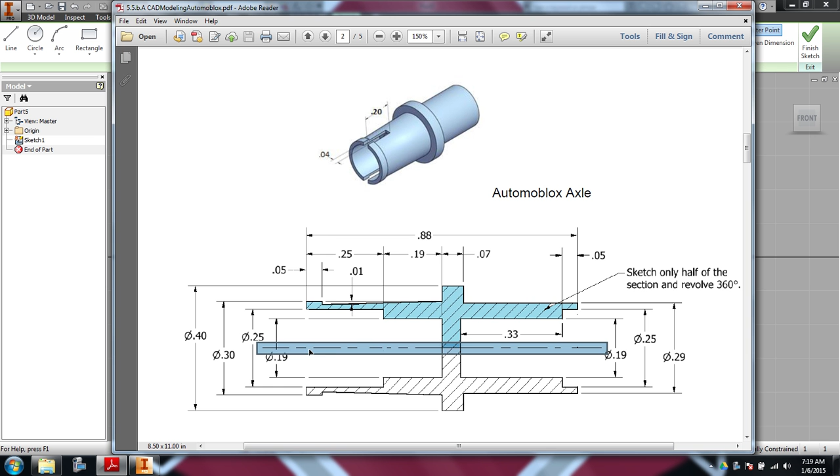All right, the Automoblox axle, and this is the first one from part 2 of activity 5.5B. And this is built as a revolve around a center line. So what we're going to do is draw half the profile and then revolve that around this center line. So I'm going to start with that.

Let's make sure we use the origin and go ahead and dimension that center line to 0.88. Now you wouldn't have to dimension the center line, but the reason that I'm doing that is to give me some perspective when I eyeball and draw my sketch. So now,

in order to make that a center line, I'm going to select the line by clicking on it, and then right up here below construction line is where we can add a center line. And then I'll just click outside that line somewhere, and we want to make sure that center line is no longer active, because when I start drawing the rest of my lines, I don't want it to be active.

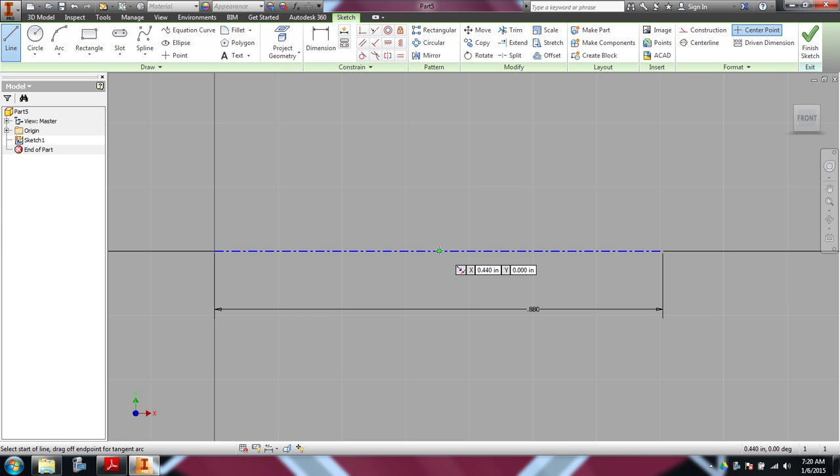And then I'm going to eyeball my parts, making sure I don't click the green point in the middle, because then that would be constrained to some geometry. So I'm just going to move over and just start eyeballing what this sketch looks like. I'm not really too concerned if it's not to scale, because I'm going to go back and add all my dimensions. The one part I'm going to exaggerate is that taper. Exaggerating that is going to make the whole sketch a little bit easier to do.

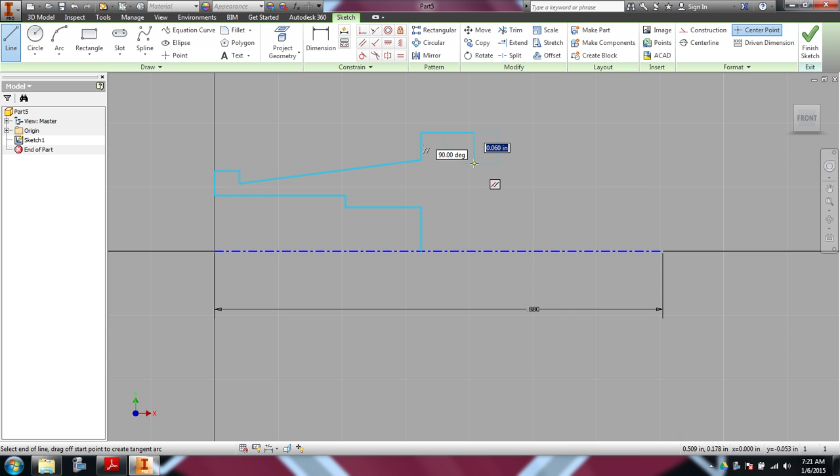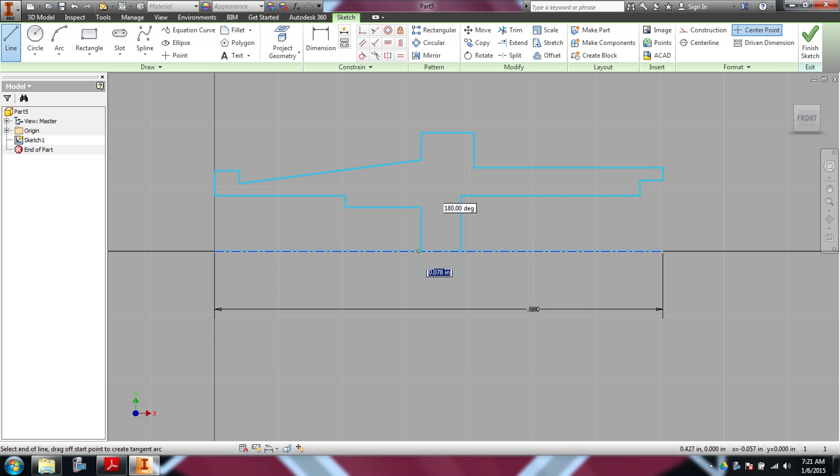So again, I am not concerned about what all these dimensions are. I'm just getting everything sketched in. And we do want to make sure that the shape is enclosed. So you notice there is an object line that I just sketched there on top of the center line. Okay, at this point I'm going to pause the video for the sake of time and add all my width dimensions.

All right, let's go back and add a couple more constraints. I added all my width dimensions as dimensioned in the sketch, but let's lock a few more things in. I want to make sure with the coincident constraint that this line is lined up with the end. Okay, and you'll notice a bunch of my lines turn blue then.

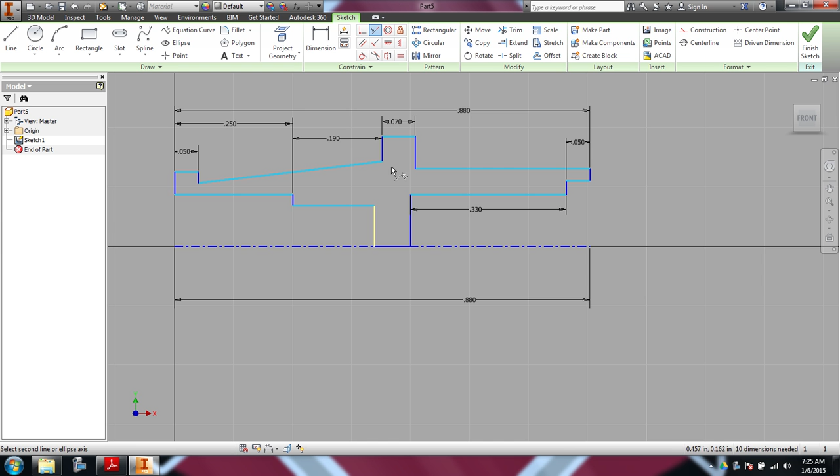And then with a collinear constraint, this line down here is not blue yet. That one should be directly under that line there. Okay, so we could have done that with a numerical constraint, but it's just lined up with geometry in the sketch.

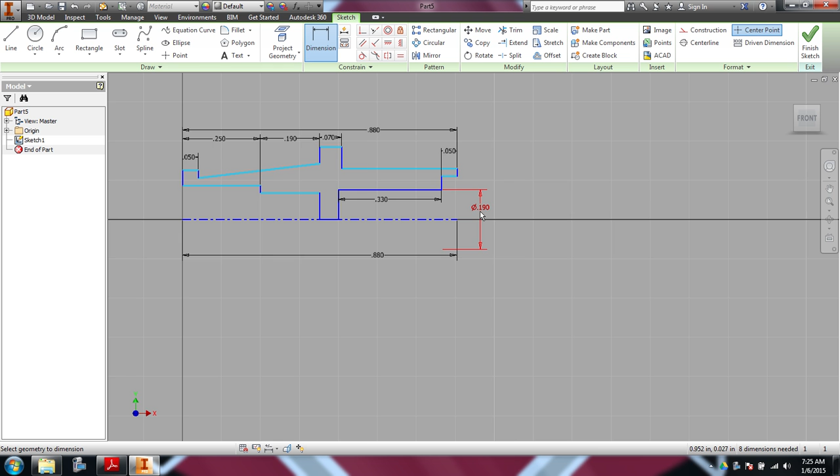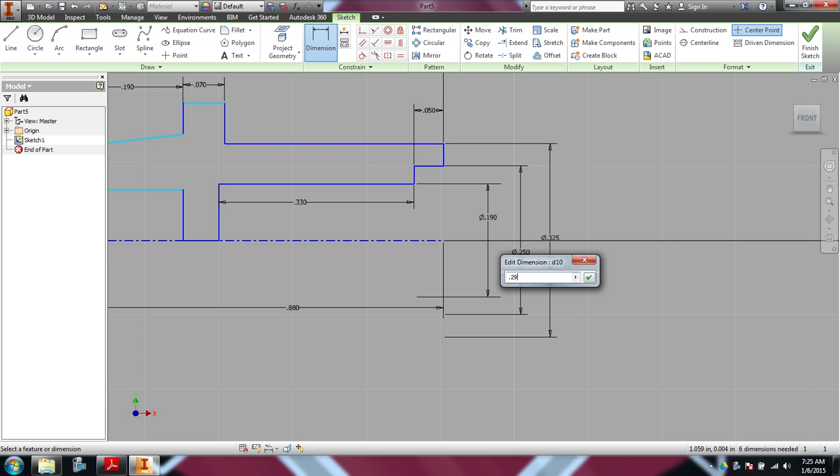Okay, now the reason we have that center line there is to be able to put those diameters in. So from this line to here is 0.19. So you'll notice that moves into place, and that's giving the diameter instead of the radius for when we're going to revolve this. And that's 0.25. That line to there is 0.29. So it's starting to give it some shape.

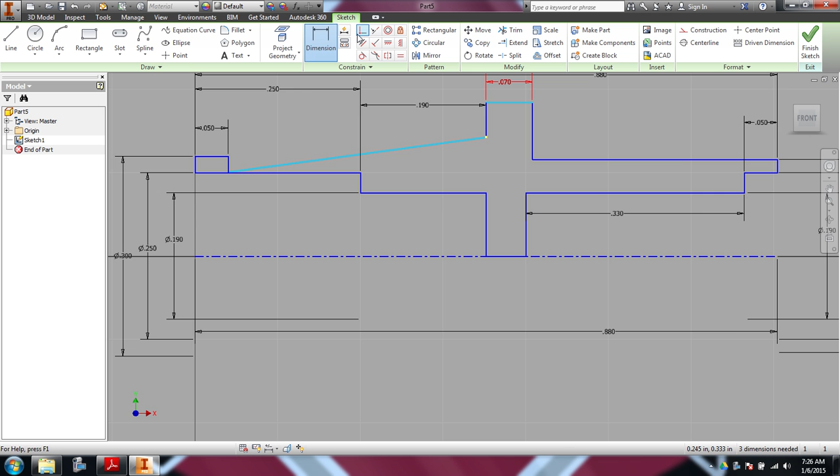We'll go over to the other side. 0.19. 0.25. 0.3. And then, let's see, the other thing we need is that 0.3 is also the distance from here to here. So I could make that a coincident. Let's make that point coincident with that line.

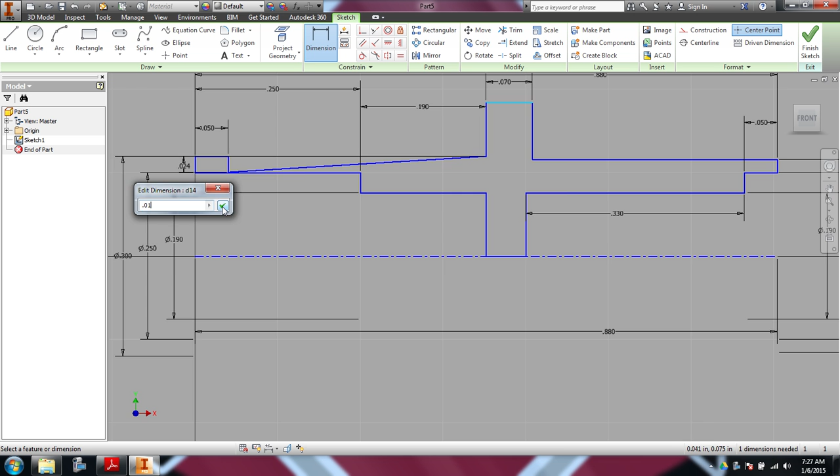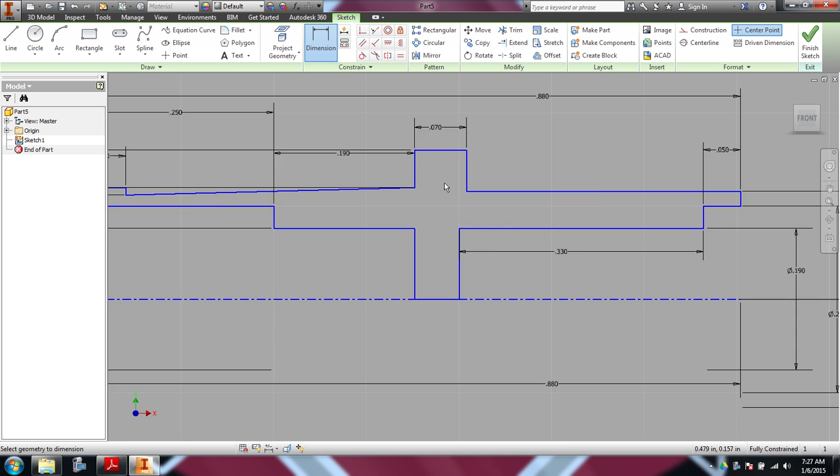And then the dimension from this line to that point, the vertical distance, if I drag sideways, is 0.01 of an inch. And then my final dimension, of course, is my overall diameter. Whoops, I want to click the center line. 0.4. Okay, so there's the axle fully sketched. And that's exactly as it's drawn on the directions.

So we'll go ahead and finish the sketch and do a revolve. And Inventor's pretty smart. It sees your center line already because we drew the center line, so we don't even have to select it. It guesses that we want to do a full revolve.

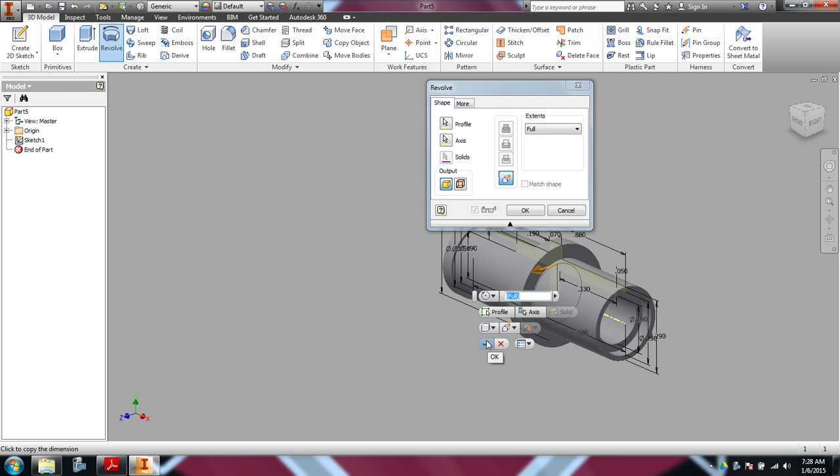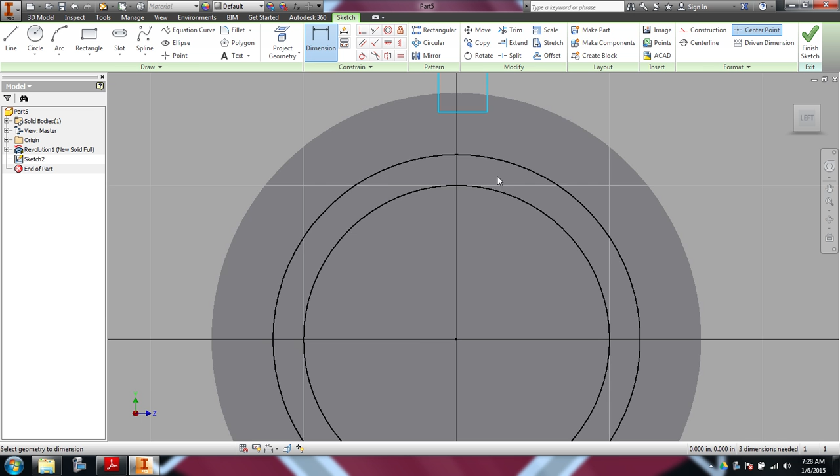Okay, and then the last couple of steps, I like to use geometry to do some of these things, but the last couple of steps we want to cut a little slot which will allow the rectangle to flex. So I'm going to first draw my rectangle. That slot that we're going to extrude is 40 thousandths. Oh, and that's not ending up where I want it to, so that should be tangent to the top of the circle.

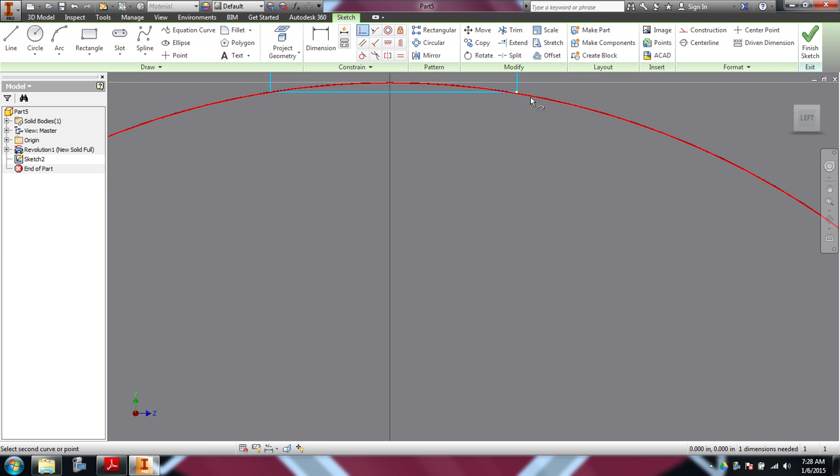And then to make sure that it will get centered, that endpoint should be on the inner circle, and that endpoint should also be on the inner circle, so that centers up the slot. And then if you want to, you could draw that again, but I like using geometry, so let's make that a construction line.

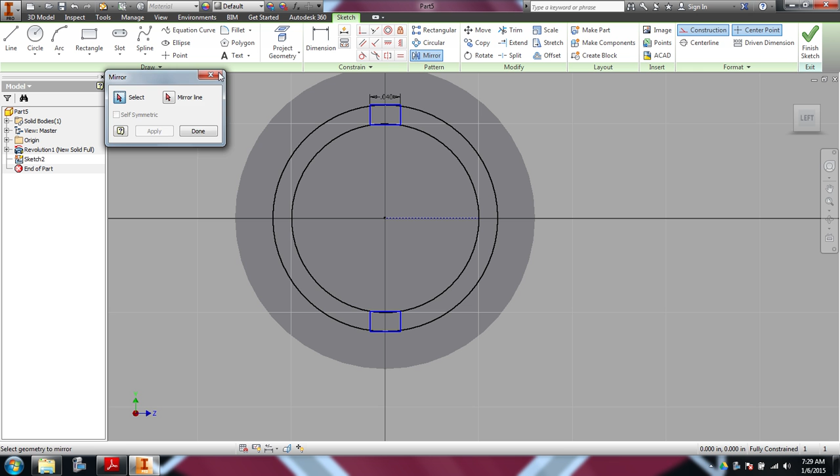And then we should be able to mirror the rectangle down to the other side, which is a little bit faster than doing the dimensions. So now we can go select those two squares and cut a distance of 0.2 of an inch. So there's the axle.